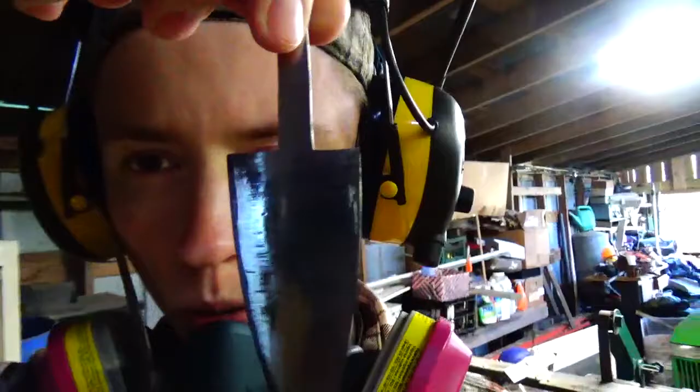Now, if you noticed, this piece of huge steel is 3 feet long by 3 inches by 3/16. This is not for knives because it's not hardenable, sadly, but this is for the grinding table to replace this old prototype.

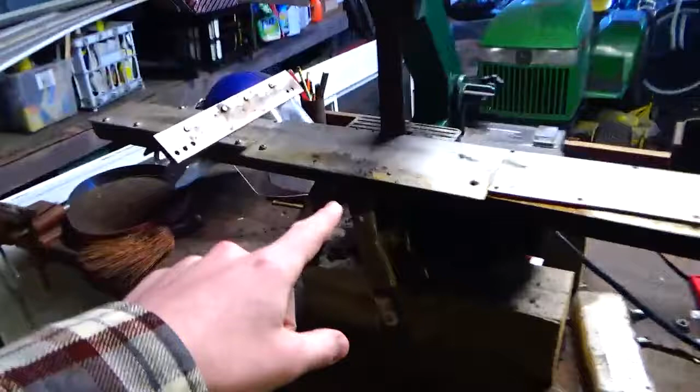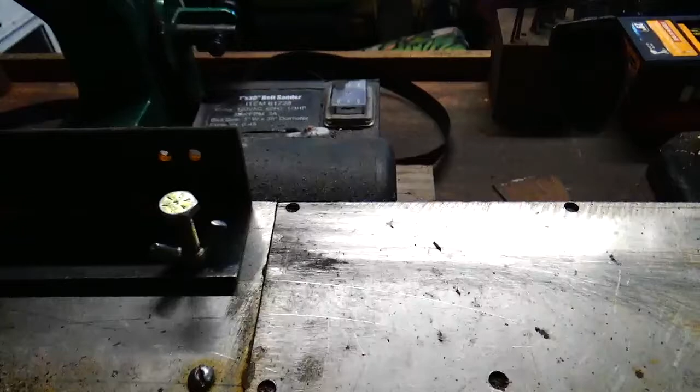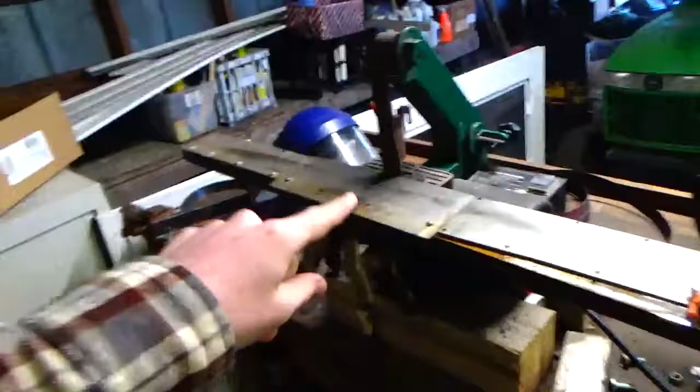The problems I was having, hold on. Some of the problems I was having is I hit this little ledge right here with my things when they were down, and they just go bump up my grinds and stuff like that. So this is going away, and that there will be going in its place. I might have to do supports on that, I'm not sure yet. But I'm going to take these clamps out and figure out how I'm going to clamp this down.

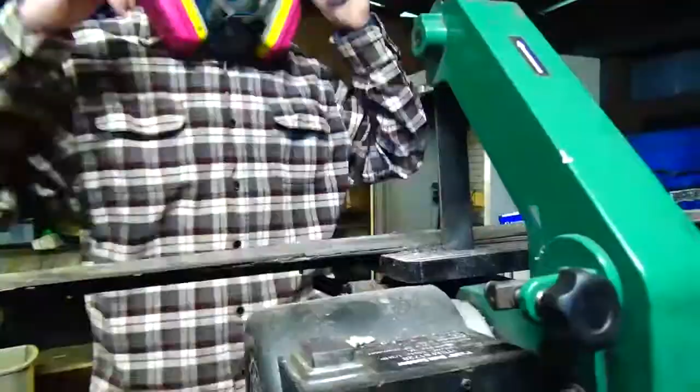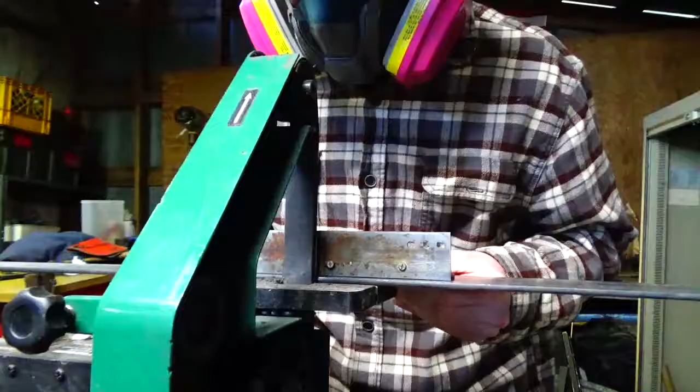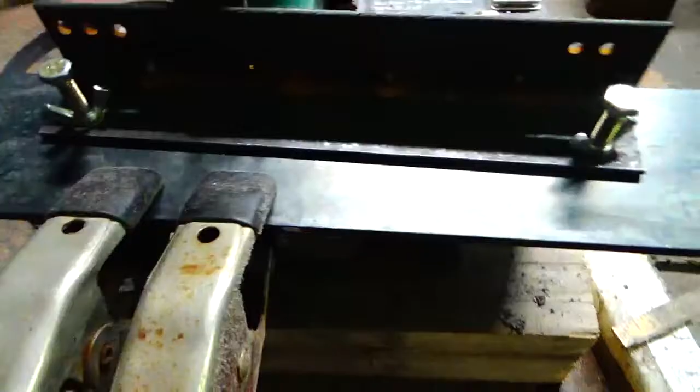Scratch the screws. These are actually pretty strong clamps, so I'm gonna try these for now. It also gives me, like, when I'm tired, I can actually lean on here a little bit. We'll see how it works.

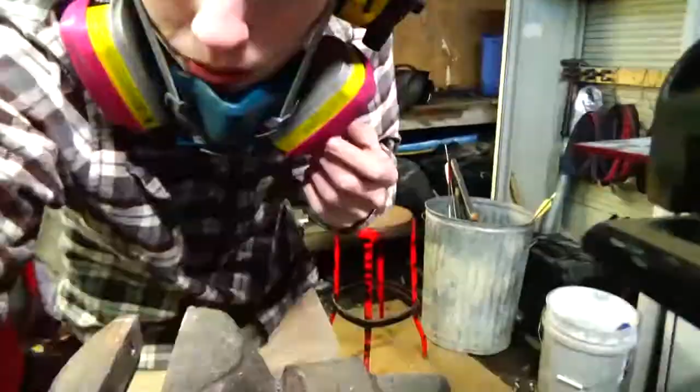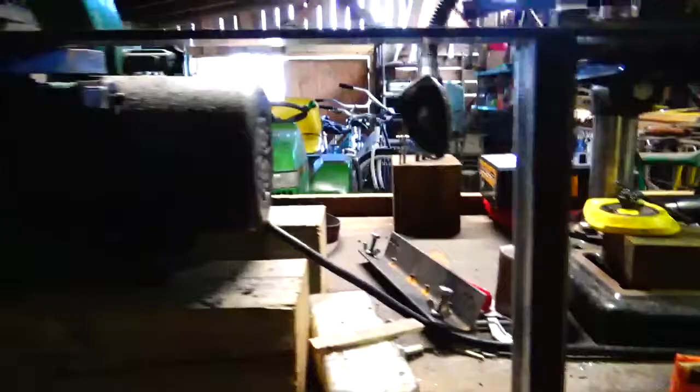Alright, I actually turned off the camera so I could, the camera angle and the grinder angle, the sparks were flying right where I needed to grind, so I had to turn you off for a second. But as you saw from the flyby, these two are in. There's a little bit of a gap on that one, so I put a little bit of cardboard underneath it, but can't be a redneck without some cardboard or duct tape. So now that's on here.

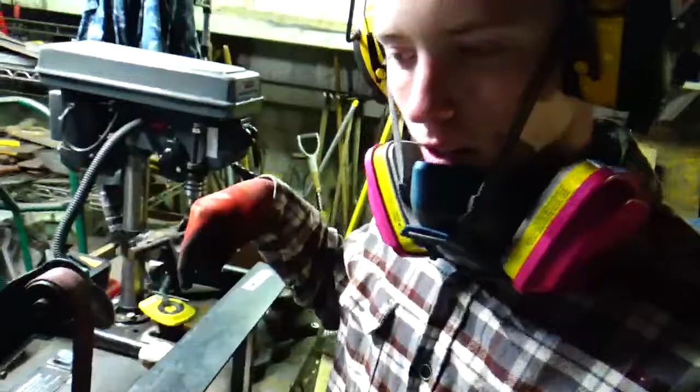We can grind that off, and then we can start scribing on the bevels. But first things first, making sure these edges are straight, otherwise my bevels will not be straight. So let's get into some time lapse.

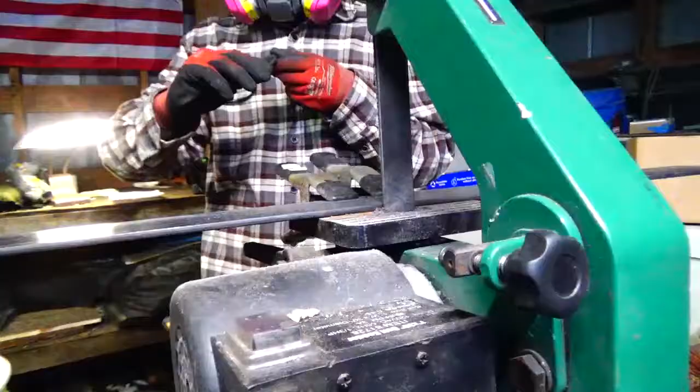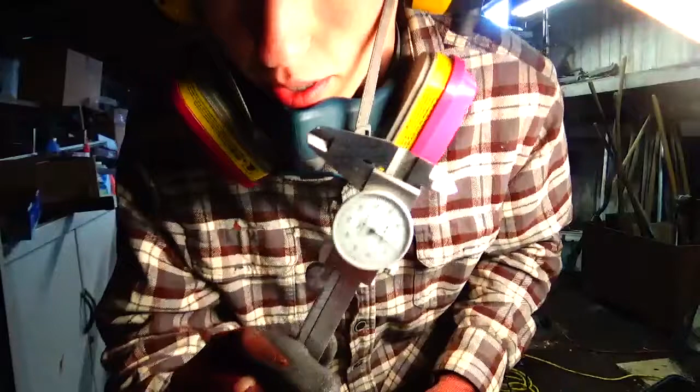Alrighty guys, she is there. I'm gonna do some final measurements just to make sure. If you do not have a pair of calipers, digital dial, whatever, they are a blessing. So now what we're gonna do is dry this off real quick, and we're gonna start scribing on the bevels.

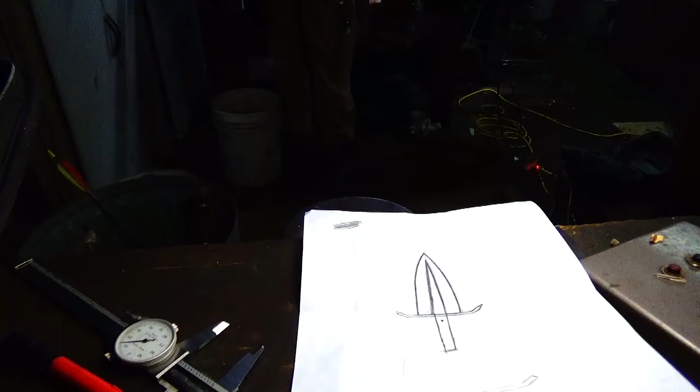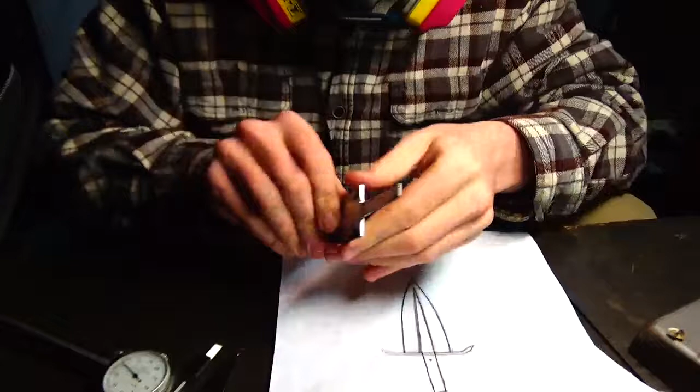Okay, so since I'm going off between the shoulders, I actually need to square up the shoulders really quick before I start scribing in the lines. Glad I caught that real quick, so let's go ahead and square these up.

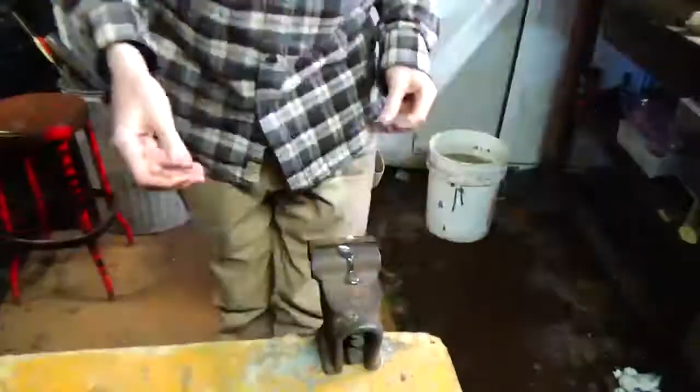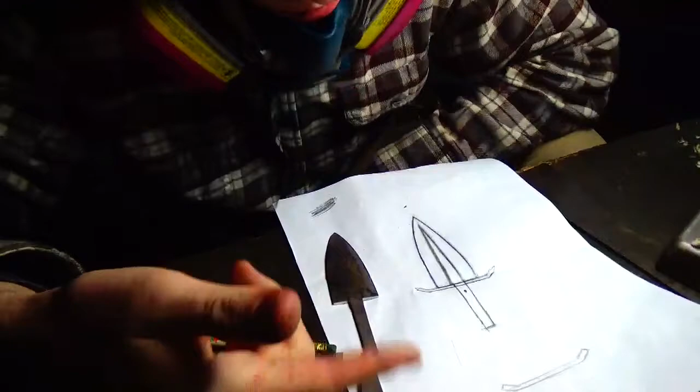So just to give you a little sense of what I'm doing, in case y'all end up doing the same thing, trying to include more tips in my videos. I have to do 4 bevels, 2 on this side, 2 on this side. The way I'm copying this bevel line is basically connect the dots.

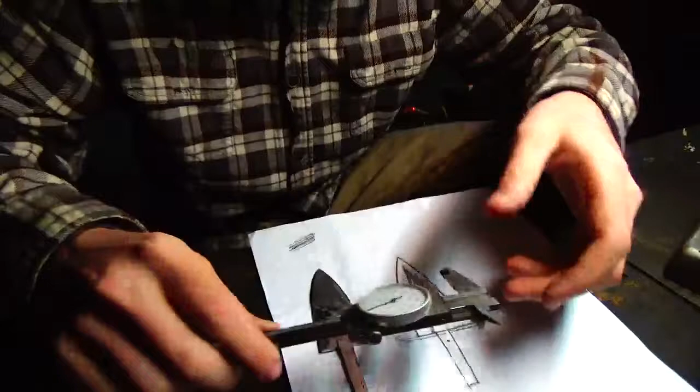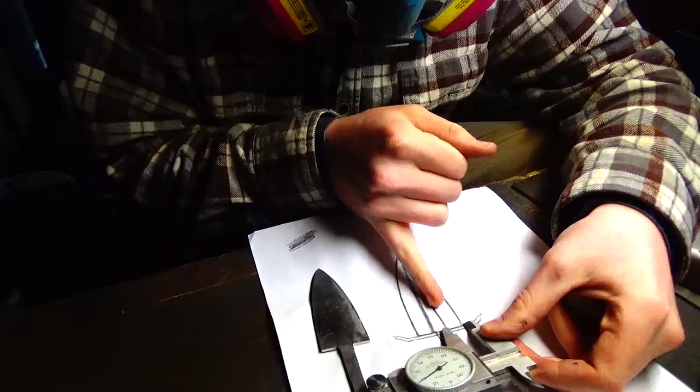So this is where calipers come in. I'm measuring from the inside, from the outside of this edge to the inside of this bevel line, from this line to this line, and then going down again and again. When I do this side, boom, boom, got that measurement. Then I come over here like I just did, marked. Now I'm gonna go from the outside of this edge to this right there. They should be the same.

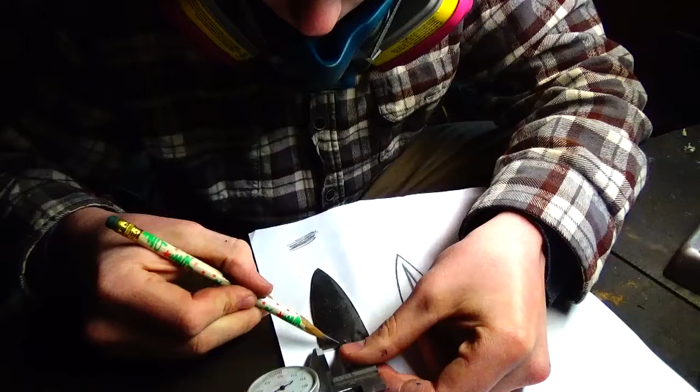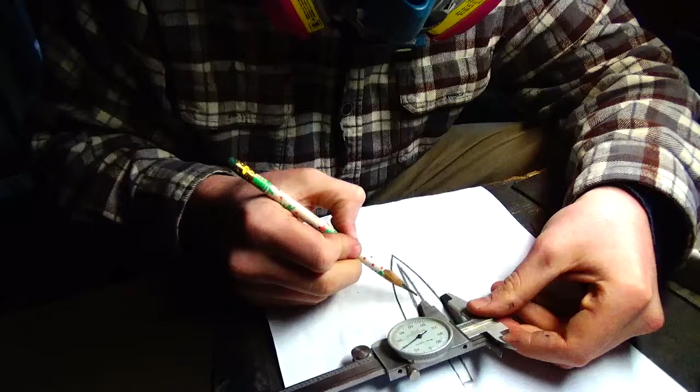Make sure this thing is sitting flat and mark it like I just did. Make sure these are lined up. Okay, so basically there, not everything is perfect. So now back to this side again, I'm gonna take the outside edge, inside edge. Alright, it's pretty much the same thing. Boom, alrighty.

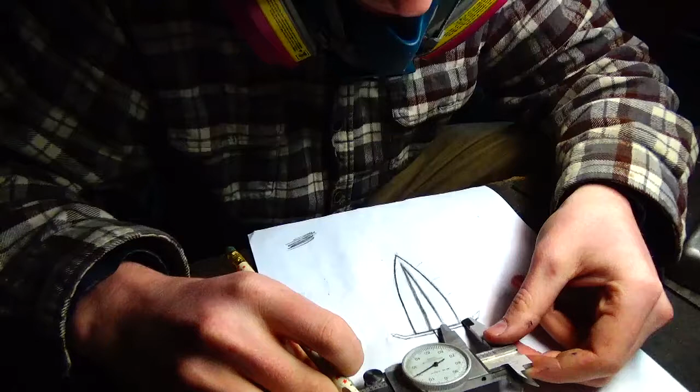Now, actually, see, I improve as I go, so let's actually do these marks in stages. I'll go down here, and I'll go down here, and then there. So that's the intervals I'm going at. Alright, so I did the top one, now down to this bottom one.

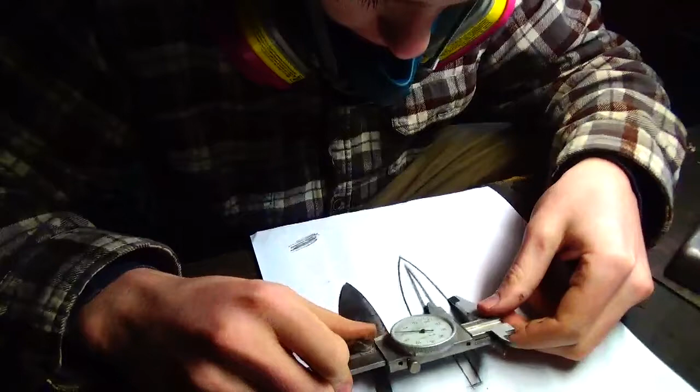I forgot to mark them on the Dirk. There we go. Hopefully I can see those. Alright, so we got one there, one there, one there. Now it's the second one right here. Outside, inside, alrighty. Where's that tick mark?

I do recommend doing this in pencil first, because you can always erase a pencil. So that looks pretty good. I'm just gonna mark that. I have acetone, so I'm pretty sure I can remove those.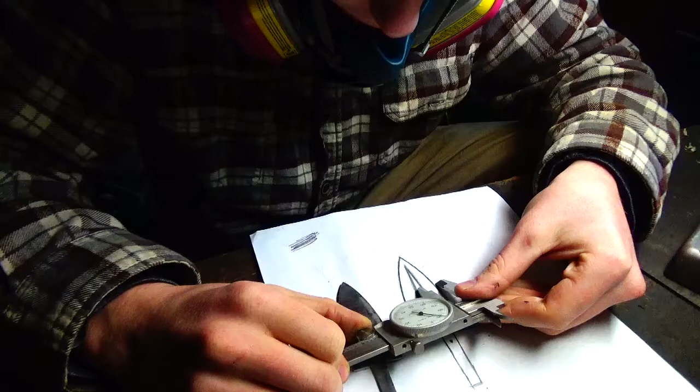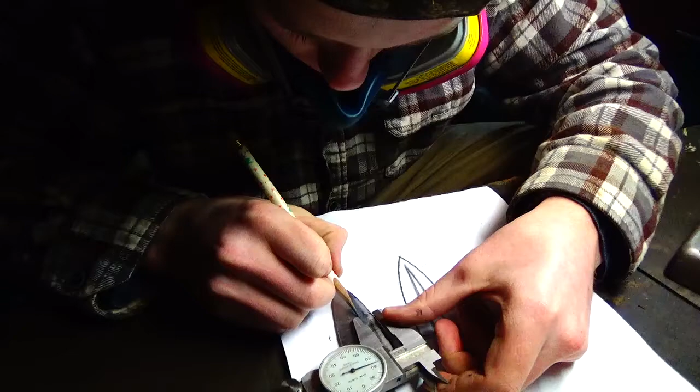Alrighty, now the third one, this is when we're starting to close in a little bit. Just about right there. Alright, we go down to the second tick mark. That looks pretty good. Tap that real quick.

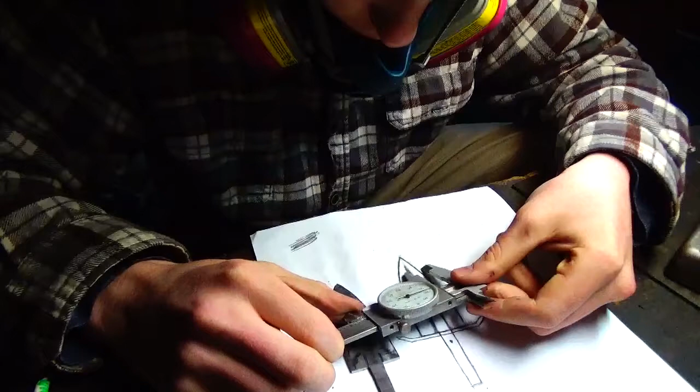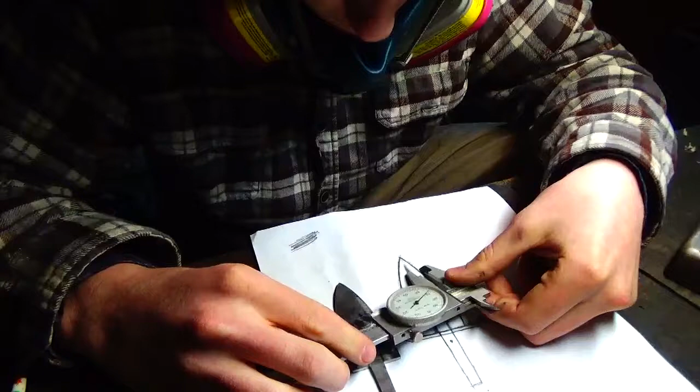Third one, this is where it gets skinny. Now what I don't know, this should work on the belt grinder, hopefully. If not, I'm gonna probably have to start over. Which, we're at the third part, so I don't think that would be too bad, I don't think.

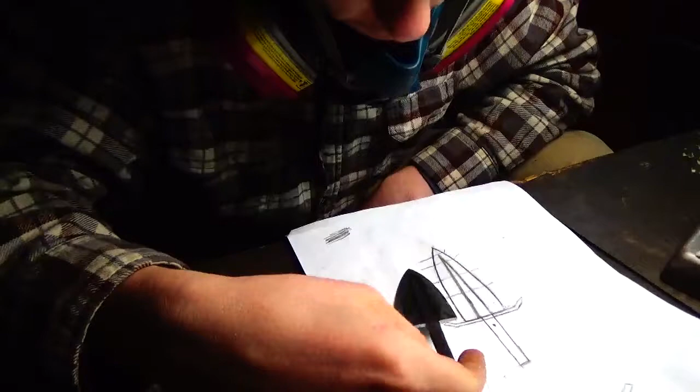And now I'm gonna do a couple more marks, and then I'll be done in 3, 2, 1, pow! Ah, that worked beautifully. I'm actually very shocked. Now this is rough, very rough, but that worked. If y'all try that on anything that y'all do, please let me know, because I'd be stoked if that actually works for this. So now what we need to do is put this on the jig, screw it all up,

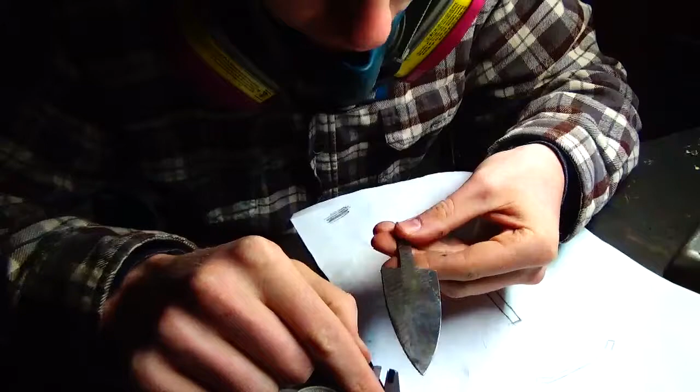Attach it and put the clamp on it, everything like that, and then set the pitch on it. This is scary. And I was also hoping to leave some of the old teeth marks on here, but sadly no can do, because that would have looked really cool. I don't know, I might end up doing a stock removal one, but probably not. But let's be honest with ourselves, probably not.

Alrighty guys, so I have no idea why it's doing this. It's a little bit different, and for some reason when I set it, it kind of walks on me, but that's okay. Here we are. This is gonna be one light blade, like all that weight is probably gonna be in the handle.

So my little trick to straighten those lines out, well it works most of the time, I haven't done it yet, is if my bevel starts walking a little bit higher up than I intended it to, and I kind of mess up where my line is, that is okay. It is not the end of the world.

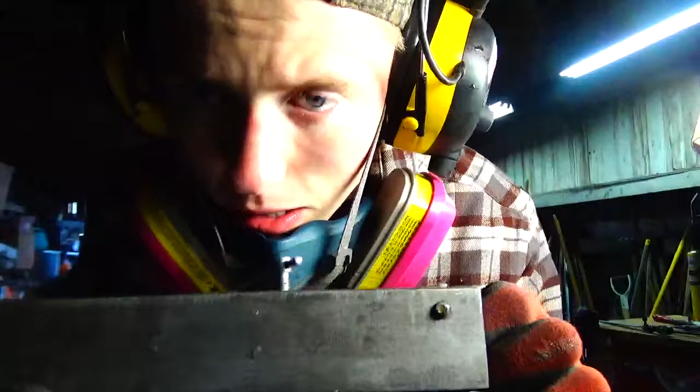What I do after I finish up where my bevel needs to be is I set these to 0, so basically flush, and I'll grind the new flat line in, and I think that's what I'm gonna have to end up doing. And now the really challenging part is I cannot actually grind a lot off because I have another side to do. So that's gonna be really fun trying to get those even.

But I'm gonna scribe on where my bevel lines need to be, and then after I do the other side, because I don't wanna mess up these angles right here, I'm gonna do the other side real quick. It doesn't take me long. That probably took me 15 minutes.

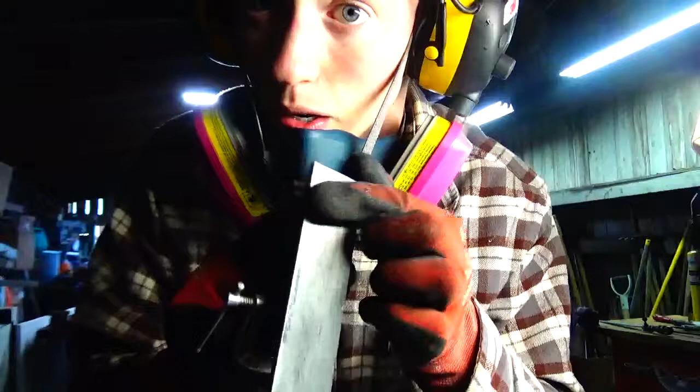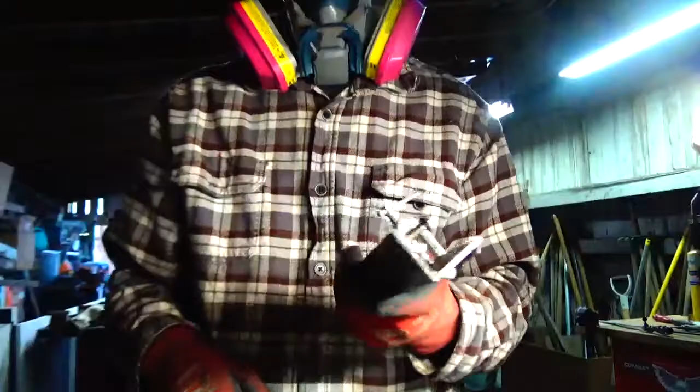And I'm gonna scribe on, so what I'm gonna do is scribe on these bevel lines. I'm still gonna do the other side first before I set these back down to flush so I don't lose my lines. And then once I get the other side done, then I'll go ahead and scribe on that flat line to where that needs to be. And then we'll go ahead and grind in the new flats. But the other side will be done in 3, 2, 1, bam!

Alrighty guys, something crazy is happening. It is still light outside. And time check is 7:08. Alright, you ready?

This is what she is. She's not pretty, but I did that little trick of doing the flats. The only iffy side was this side, I think. But I'll get it more straightened out when hand sanding. I just gotta talk to her what grit she wants. But I'm pretty happy. Could have done better, but you win some, you lose some.

This thing has the weight's all on the tang now. Like, I'm pretty sure the tang is heavier than the actual blade part, but this is what she is.

So next part of it is going to be hand sanding, and I think I'm gonna do a live stream on a Saturday morning for that. Let me know if I should do that. I'm not gonna end it out here because I'm not sure on where my time is. So if I've gone past 10 minutes or something like that, you'll see future self end out this video. If not, you'll see me tomorrow to work on some more finer details. I guess get the, there's like one bevel that I just need to tweak a little bit. So I will see y'all either in the future or tomorrow.